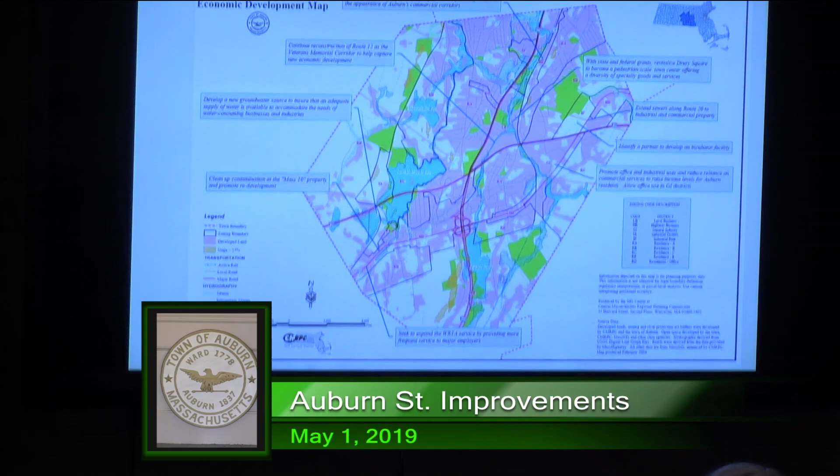I put this up because this is from the 2006 master plan's economic development map. What caught my eye was it identifying Drury Square as an area that should be enhanced for pedestrian activity, enhanced for commercial activity, have zoning changes to make it more attractive to investors, businesses, retailers, pedestrians and their customers, and also identifying state and federal grants that may be available to implement the infrastructure—which brings us here tonight on the roadway improvement projects. I'd consider it a partnership with the state, and others more qualified than me will explain the state roadway portion, but that's exactly what the master plan was trying to accomplish 13 years ago.

One other thing—there's another article on the warrant, a Drury Square village bylaw. I want to make sure I get this right—it's Article 32. It's a large warrant.

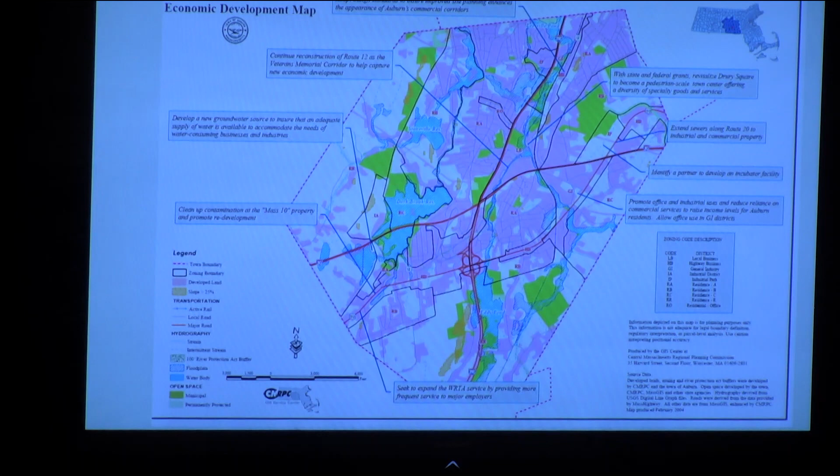They are completely separate. Tom had asked me about that tonight, so in case anyone else was curious, these are two separate articles, independent of one another. If one goes and the other doesn't, it doesn't jeopardize the other project. I'll tell you, if both are approved, they complement each other extremely well. Adam Menard, our town planner, is here to answer any questions on the bylaw itself. After this is over we'll focus on this piece, but we don't want to leave your questions on that article unanswered.

On that article, because we've been asked by some people how this happened—how did we get to this—it's been in the works for about a year and a half, with 8 public hearings. There were 2 meetings where we specifically invited town meeting members to explain this to them. There was one meeting open to the public but focused on inviting the businesses in Drury Square. Then there were 3 additional community meetings where we invited everybody to come and comment. We took all the comments from all those public meetings and incorporated them into the bylaw, then brought it to the planning board, which had 2 hearings and unanimously approved it, I believe, last month. So the bylaw in the warrant has been vetted through the community, through 8 public hearings and a year and a half of research, work, and public input.

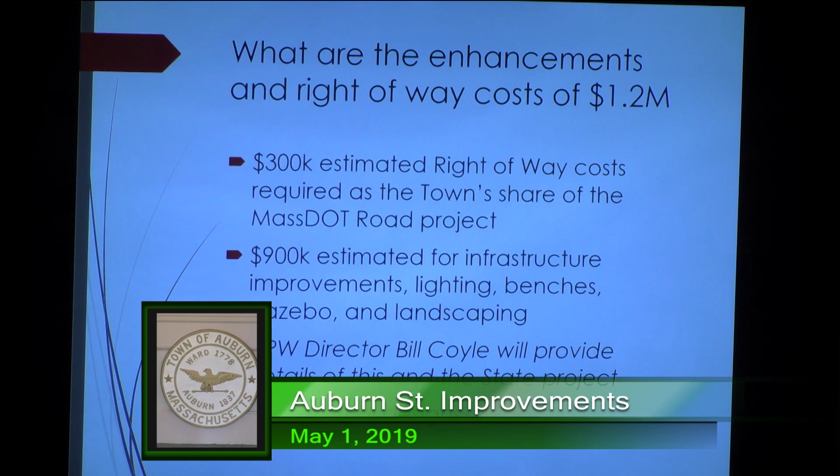So, to get to this project—what are the enhancements and right-of-way costs totaling $1.2 million? Bill Coyle, our DPW director, will introduce the team and give you the details; I just want to be broad here. About $300,000 of the $1.2 million is the estimated right-of-way cost required for the state to move forward with their portion of the project. The remaining $900,000 is to add enhanced infrastructure improvements that the state would not pay for.

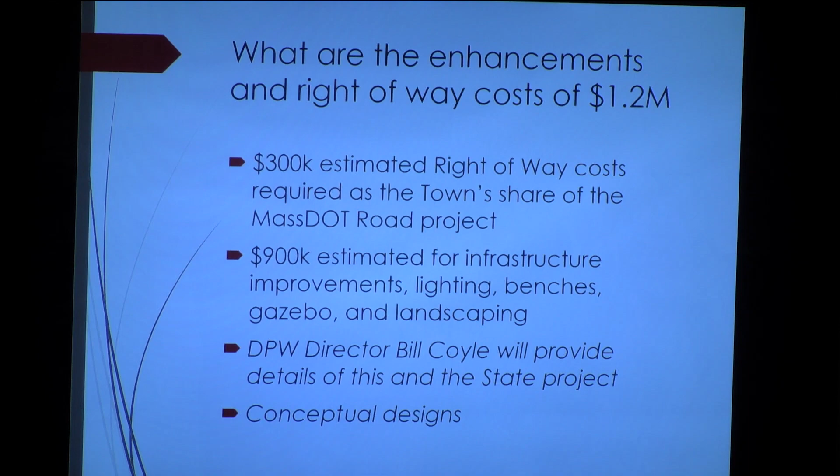These include enhanced lighting, the ability to add flowers, plantings, banners, benches, a gazebo, landscaping, trees, and greenery—just making it look more attractive. The roadway improvements will make it safer. We're trying to enhance its look, usability, and friendliness, so we encourage residents and visitors not just to drive through Auburn but to stop, stay, use our parks, visit our retailers, have lunch in the park, see the pond. There are things people just drive right by, and we're trying to slow all that down so they take a look, while still keeping it functional.

You've seen the conceptual designs, so a question was asked. Dan, we spoke the other day, so thank you for asking. He said, Julie, have you guys looked at what the impact of the borrowing is? I didn't want to answer without going through all the analysis, so I told you I'd get back to you, and I thought this would be important for everybody.

Our assessor, Cindy Cosgrove, and our assistant town manager and CFO, Ed Kazanovich, worked a lot on this. Ed was saying that we would probably do a $1.2 million, 10-year borrowing on this for a bond. We don't need all 1.2 in 1 year, but we do need the approval of it all at once. The right-of-way work would be the first part done, probably in the first 6 months to 1 year. The remaining $900,000, depending on how the project went, would probably be toward the end of the first year and into the second year and beyond.

How we would fund it: we would do a BAN, which is a short-term borrowing. The interest is insignificant on a BAN. We do that with our school projects, all of our borrowing projects. Then when the project's done, we would bond it with a 10-year bond.

Based on an average residential single-family value, and this is from the assessor's office, all data-driven, of $263,291, the impact on the average single-family residential property would be $18.43 that year. That gets built into your tax rate, so it goes into your bill the first year. It doesn't compound, in other words it stays there, so the next year it's still in there, but you're not adding another 18.43. So over 10 years, you're talking $180 total.

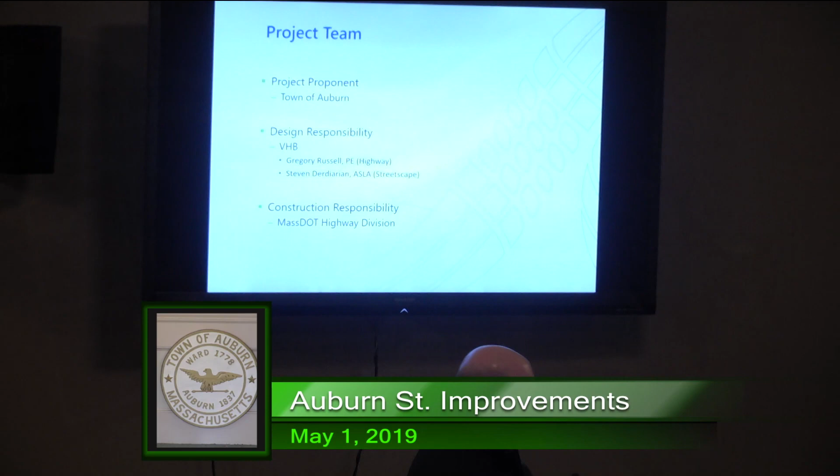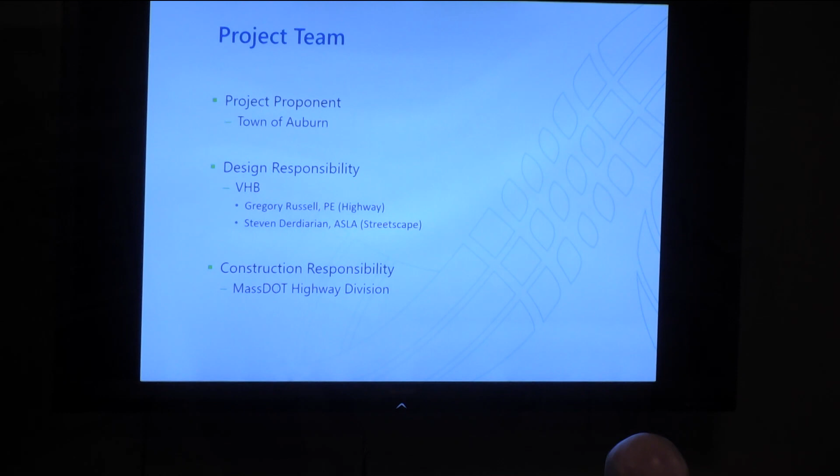From a DOT perspective, the town is the proponent for the project. The town hired VHB to develop the design plans and bring it through the Mass DOT process. Once that's complete, DOT takes over with regards to construction and construction admin.

I was using the down arrow. Just use that one. There we go, thank you. Let's do this.

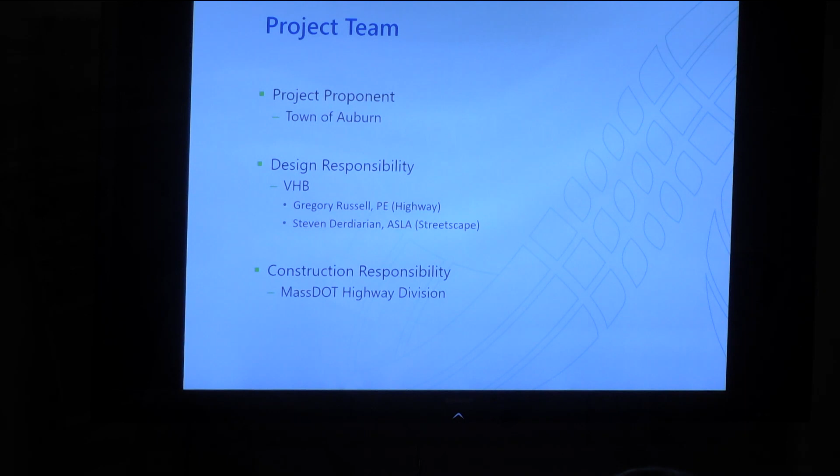Let's close out some of these.

While they're fixing that, and it's a good chance, I did want to add a couple things. I was going to add them at the end, but I'll add them now, so give them an opportunity.

I mentioned it to Tom, I believe, but wanted to let everyone know we're also working with Central One Credit Union, and we are developing a new facade program for Drury Square, totally separate from this, but again, it's another enhancement to Drury Square. Through Central One Credit Union, businesses will be able to get low-interest loans and potential grant incentives for fixing up the front of their buildings and making them nice and putting up nice signage. Another thing, we just got a wayfinding grant.

Again, this ties into this. The wayfinding grant is going to help us with signage and designing signage. We also received a design grant to help us with the facade program, to actually do renderings and designs of what the buildings could look like for those owners who may be interested in doing upgrades. Completely voluntary, you don't have to, but there's some great programs that we're doing with this.

And lastly, Senator Moore and Representative Frost over the last couple of years have asked me what our priorities are, what they could put in from this potential funding from the state. As of yesterday, Senator Moore, I believe, had put in $50,000 for Drury Square in the state budget. We don't know if we'll get it or not, but if we do, that is another $50,000. So I just wanted to add that. Thanks.

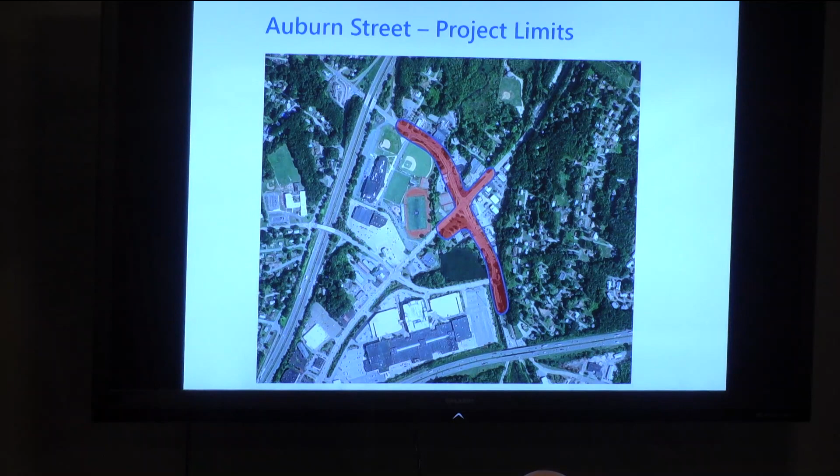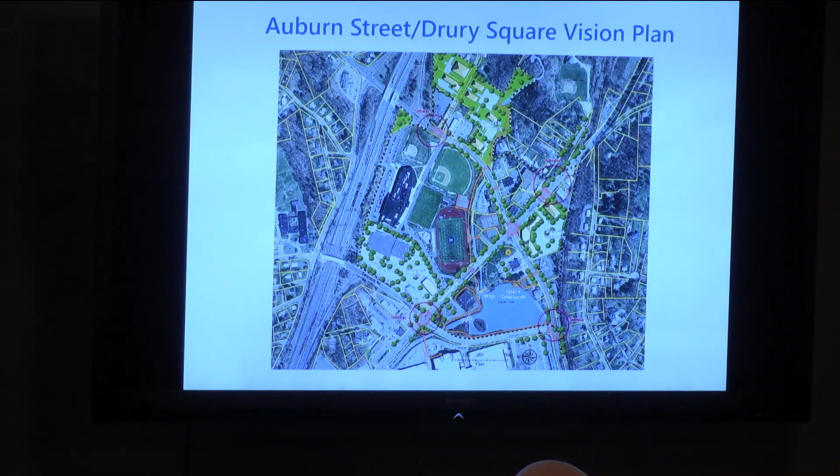This is just reflecting the Drury Square vision plan that Julie had mentioned earlier, and this was kind of the driving force of some of the parks and streetscape that has been incorporated into this project, which Steve will talk about in a little bit.

Going back to what Bill started, some project history. The town initiated this project in 2013. They brought VHB on board, and since then we've been working progressively to move the project forward through the DOT process.

In 2017, we conducted a road safety audit at the intersection of Route 12 and Auburn Street. At that location, at that time, there had been 39 crashes in 3 years. It was considered a high crash location, and because of that road safety audit, the state has assigned money from a specific pot of money onto the TIP, which has allowed the TIP value to grow some. That's approximately almost $600,000.

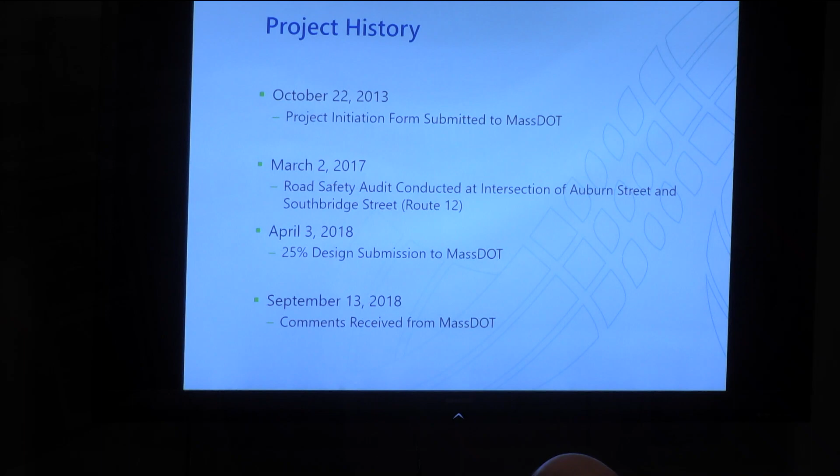The 25% design was then submitted last April, in 2018. We received comments back after doing some field work, utility walks with utility companies, received comments back from DOT in September, and we've been working through that point to now, addressing those comments and trying to schedule a design public hearing, which will be one of the next steps.

Project needs, among other things, pavement. Up here we just have a couple examples: one's the crosswalk up by the high school, and the area heading towards Brotherton Way. There's some long-term pavement deterioration that's been happening along the corridor. This is most noticeable south of Route 12, heading towards the mall. The area along the corridor has been patched numerous times due to utilities, and some of those patches are starting to sink, as you can see through the crosswalk.

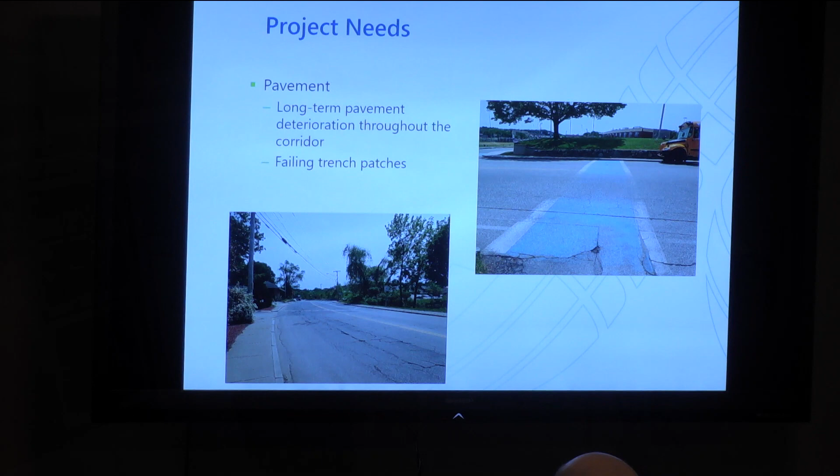Safety, as I mentioned, we've done a road safety audit at the request of the state at the intersection. Among other things, there's obviously poor sidewalk continuity throughout the corridor. Route 12 is a barrier with poor pedestrian accommodations. There's really no bicycle accommodations currently, and we're going to look to fix or improve that at least. There's also missing, non-compliant, or no wheelchair ramps at all in certain locations.

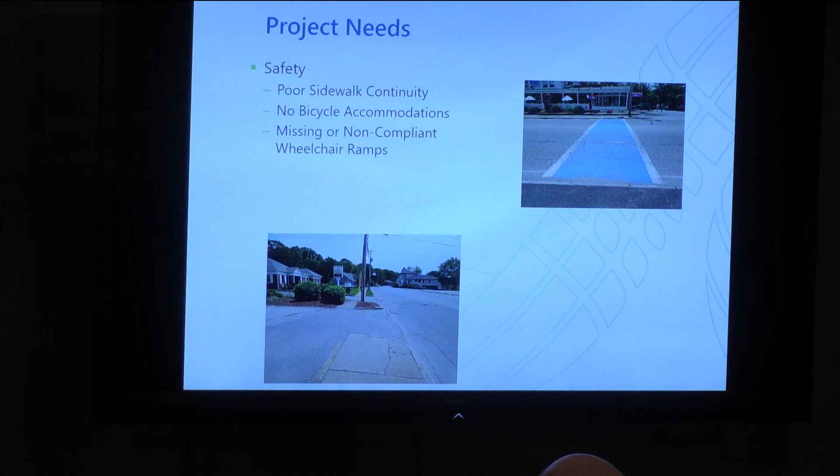Some of our goals is to fix some of that. Streetscape, one of the things when you go down the corridor, there's really no distinction. There's large, wide-open curb cuts. There's really no distinction between the sidewalk, the parking lots, the driveways, the road, in some cases, in front of the fire station. There's a huge curb cut. There's no real definition of where the sidewalk is and where the road ends, where the driveway and parking starts. And across the street in front of the Verizon store, there's really, again, no definition between the drive aisle, the parking, and the sidewalk.

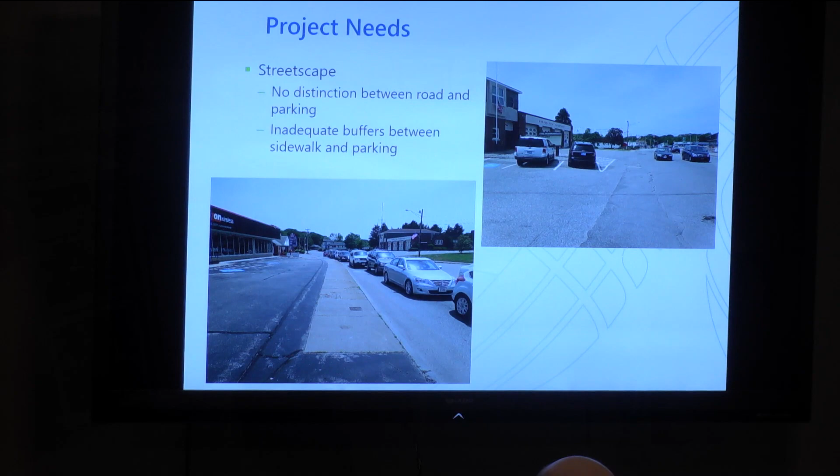So, project goals: we want to improve the roadway and the intersection safety for a variety of things. Specifically, at the intersection of Route 12, we're proposing all new pedestrian signal equipment. This will provide exclusive pedestrian phases across that intersection. We're looking to carry the sidewalk across the island, the channelized right turn island, to connect that to the sidewalk on the fire station corner, to provide a continuous flow of pedestrian traffic.

We're also proposing rapid flashing beacons at the crosswalk by McDonald's and the high school.

Roadway, the pavement, drainage - we're going to try and reuse as much of the existing drainage infrastructure as possible. We will be adjusting it as needed, installing new catch basins where needed. Those will have deep sumps and hoods to improve water quality. For the majority of the project, mill and overlay will occur between Route 12 and the high school. Once we get past Route 12, right now it's being proposed to be reconstructed - a full-depth reconstruction or reclamation, one way or the other. But that's a more intense process due to the failing pavement in that area.

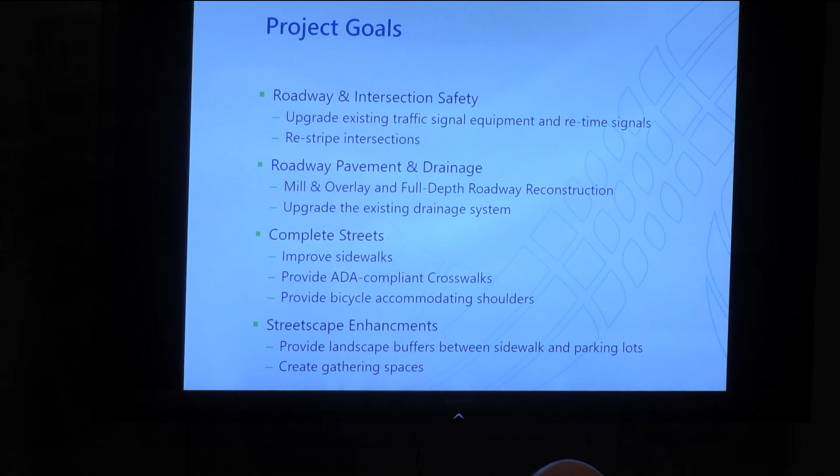So I'm going to go through the corridor, or the roadway design. These are the same slides that are in the back of the room that will be set up. And then I'll go through this, and I'll turn it over to Steve to go over the landscape.

We looked at numerous ways to reduce the pavement width, but due to the high number of curb cuts along the corridor, there really wasn't a good place to either implement occasional left turn lanes, or narrow it down to one lane, just because we felt that the abundance of driveways would result in traffic issues up and down the corridor. So this is kind of the solution that we have come up with at the time.

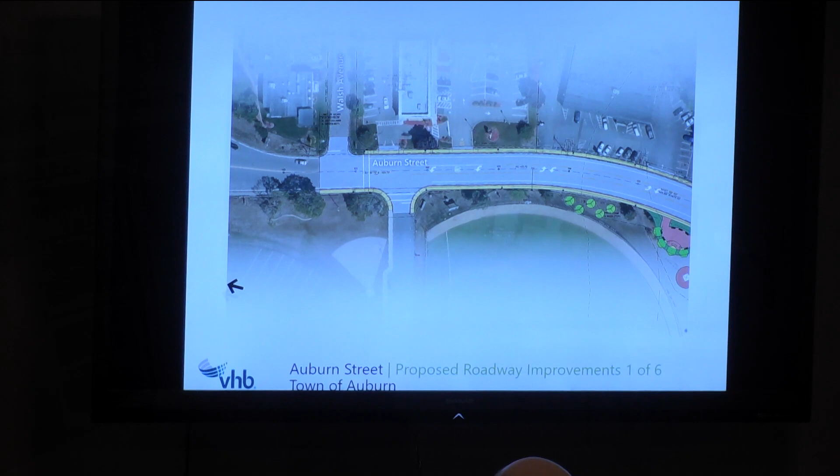Moving down past the high school, we have the first of the pocket parks just before the brook crossing. And then we're also on the bridge.

The initial intent was to leave the bridge alone, basically cut at either end. The state came back and requested that we take a look at replacing the guardrail leading up to the bridge. And that, in turn, leads to needing to basically replace the existing bridge rail over the bridge. So we are looking at that now. That could be done in a few different ways. That may require replacing the sidewalks over the bridge. So we are still looking into that and dealing with MassDOT on how best to approach that issue.

And as we go through, you can see we're adding landscaping where we can. This is in front of the post office property. We've tried to better define the parking area there.

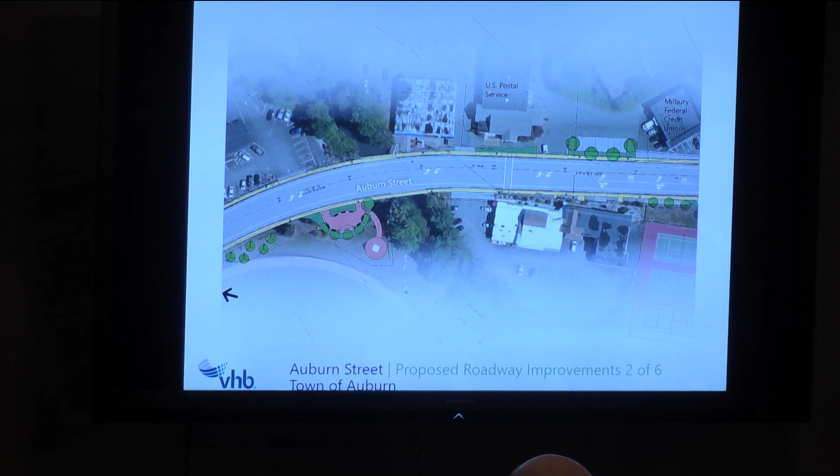And that brings us to the Southbridge Street Route 12 intersection, where again we have another park on the northwest corner by the basketball court and tennis courts, and then a larger area on the southwest corner by the fire department. This includes refurbishing the island.

Right now it's difficult to see when you're trying to make a right turn due to some of the vegetation that's there, some of the boxes. This was brought up during the road safety audit, so we'll be reformatting that island to make it easier to see when you're making a right, as well as to carry the sidewalk all the way across and provide a continuous path for pedestrians.

We're also adding some landscaping on the east side, in front of the Verizon store in that plaza, to kind of break up the parking.

For the signal, right now we're proposing, as part of the road safety audit, one of the recommendations that came out of that audit was to convert the northbound Auburn Street approach to a left turn only and a through-right.

Where currently today it's two general purpose through lanes with a permissive left turn. The permissive left turn will still stay for the northbound.

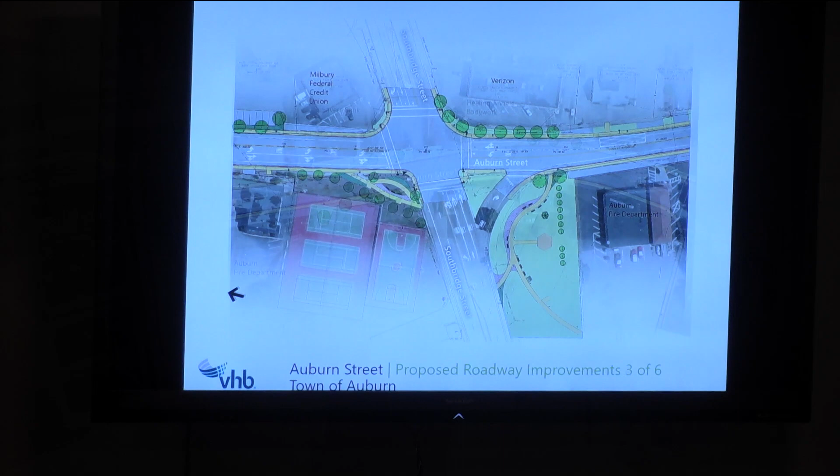Moving down past the fire station, again some more landscaping, trying to define some of the parking areas, especially just south of the fire station. And again, carrying the sidewalks—these are standard 5-foot sidewalks, granite curb, all the way down, with 5-foot shoulders and 11-foot travel lanes for the majority of the corridor.

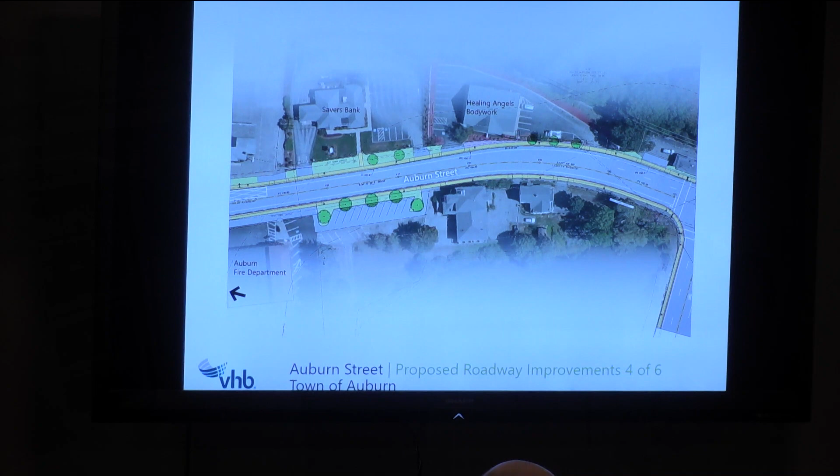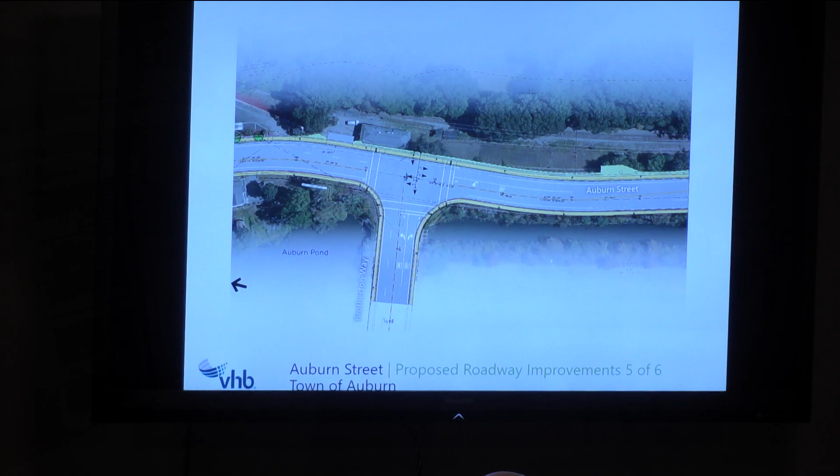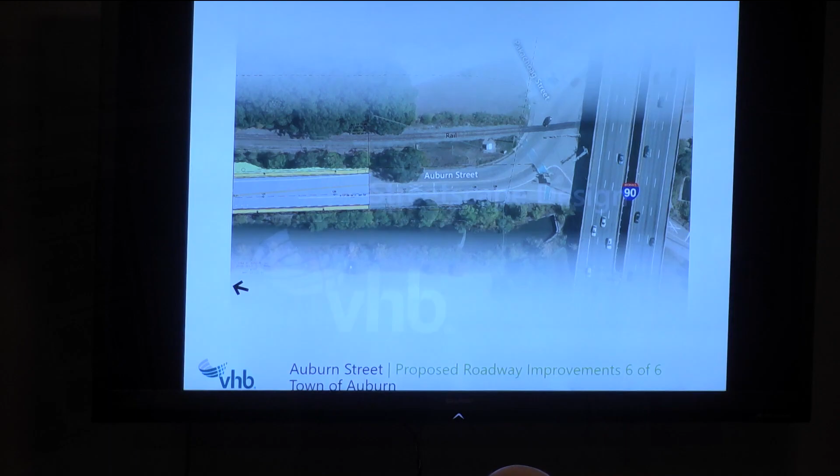And then we get to Brotherton Way, where we have a new traffic signal. We'll be, for the most part, maintaining the existing lane use and providing a new traffic signal with pedestrian crossings with exclusive pedestrian phases. And that carries us to the end of the project, where we tie in just before Central Street and end there. Now I'm going to turn it over to Steve to discuss the streetscape.

How do you advance to this? Oh, just... Okay, very good. Hi.

Hi, I'm Steve Dudarian, the landscape architect for the project. I think Greg's brought you through the overall corridor and given you a sense of the roadway design, but in this area what we've tried to introduce is a much more pedestrian-friendly corridor, essentially.

The sidewalks will have feature trim strips along the edges that are stamped concrete rather than brick, so they're very low maintenance, but they give it a pedestrian scale.

Where opportunities present themselves, we're also introducing pocket parks—small areas. The one indicated in this slide, that semicircle, is an area where there's already some memorials, as well as the historic cupola alongside it. What we're introducing there will be a bike rack, as well as benches, some flowering beds that are very low maintenance using perennials and ornamental grasses—simply a kind of gateway treatment as you're entering the corridor.

At this point, on the opposite side of the road by the post office, we'd be working with the post office, suggesting the idea of bringing in a green panel along the front of their parking lot. This is one of the locations where, as you drive down the corridor, it's very difficult to tell where the roadway ends and the parking lot begins, because it's all pavement through there. Now we'll be introducing a new sidewalk, street trees along that edge as well, and in front of the post office, also dressing that up in collaboration with them.

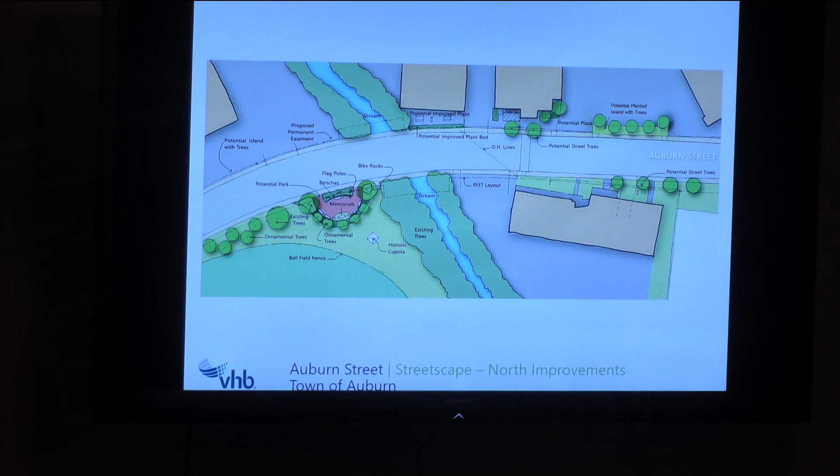And let's see if I can do this. Okay. The Southbridge and...

Auburn Street intersection—we're introducing a park on the left side. In this location here, it's easier for me to just point, where currently there's simply a path there, with a metal guardrail along the roadway. You'd never even know there's a green space in that location.

Working with the town, we've come up with a suggestion of introducing bollards in lieu of the guardrail. They'd also serve as a protection device, but you can see through it to the space beyond, raising that area up more towards street level, so that you can see a seating area for folks in front of the basketball court, and introducing some trees as well, creating an informal edge along that pathway.

It's part of an overall design for that intersection, where on the other side of the road we're introducing, on a very steep slope that exists within the right-of-way, some plantings. At the Verizon building on the upper right, in some of the gained green space that's part of this project, we're introducing some street trees and ornamental grasses flanking the sidewalk, so that you have a very nicely defined edge, but can still see the Verizon parking.

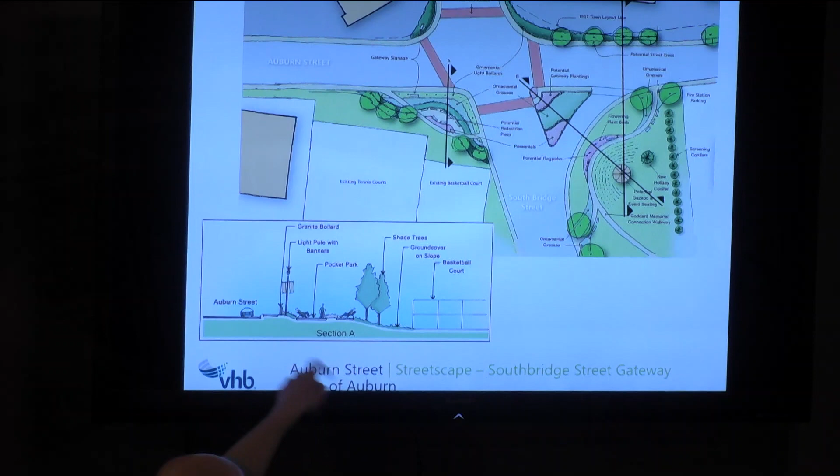We've also provided some section views through here, giving you a sense. This section here is the section shown by that dark line, first dark line, A.

This cuts through the pocket park to the basketball court on the right, giving you a sense of the slope down to the basketball court, the terrace we're creating at a higher level so you can see pedestrian activity, the idea of benches, some flower beds, ornamental lighting possibly with banner arms, and granite bollards edging this, so you now have a transparent edge and can see there's another of Auburn's parks in this location.

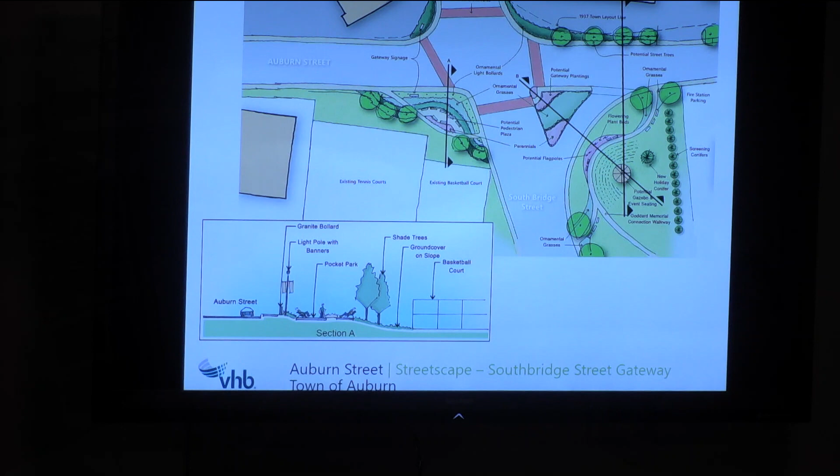It's really just a blank side of the building there, so this would introduce some interest and a backdrop, and possibly mound it up to get more mileage out of it.

In the center would be the park space itself, along the walkway where you introduce flagpoles, ornamental lighting, seating, that sort of thing. Between that area and the gazebo, possibly have some seating as well, so you could have summer concerts out there and other activities.

And the triangular island begins to give a sense of the idea of lower growing greenery, very low maintenance, and ornamental grasses, so that triangular island now has a cohesive design with some real interest as you're driving by.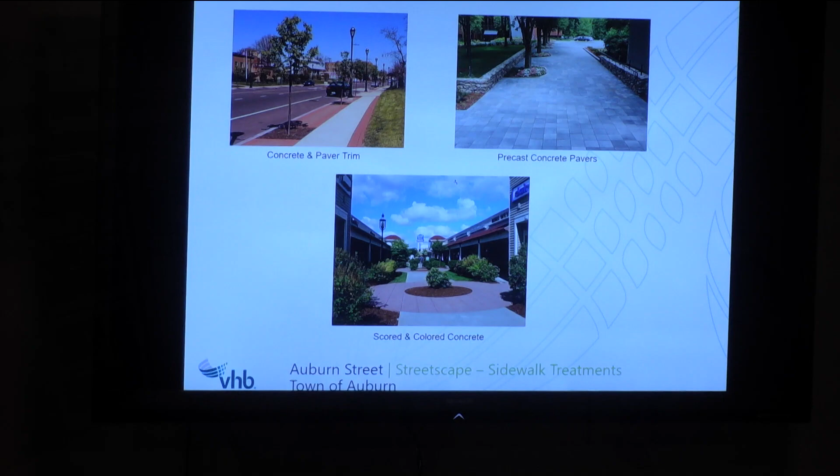And the idea of again introducing a gazebo into the park area so it becomes a true public space. It's basically what's called placemaking, and it really makes for an iconic image in Auburn Center.

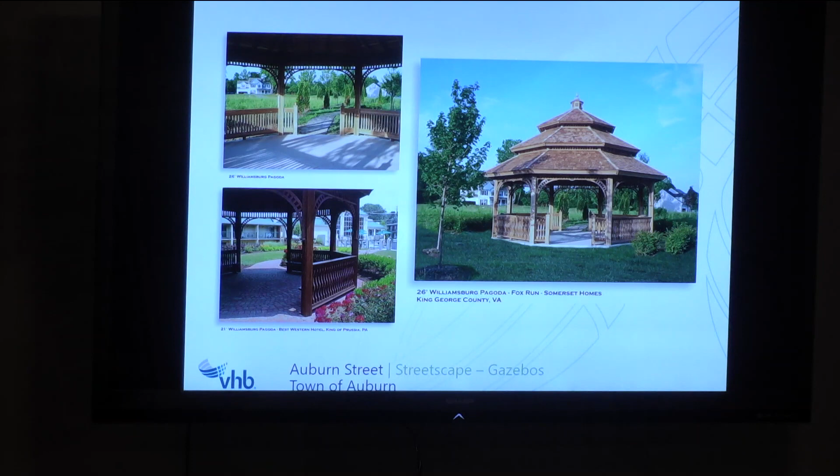Okay, the idea of bollards, which could be introduced along the edge of the tennis court area, which is currently all metal guardrail, so you really can't see what's beyond that. This would still preserve the safety features, but allow you to see in.

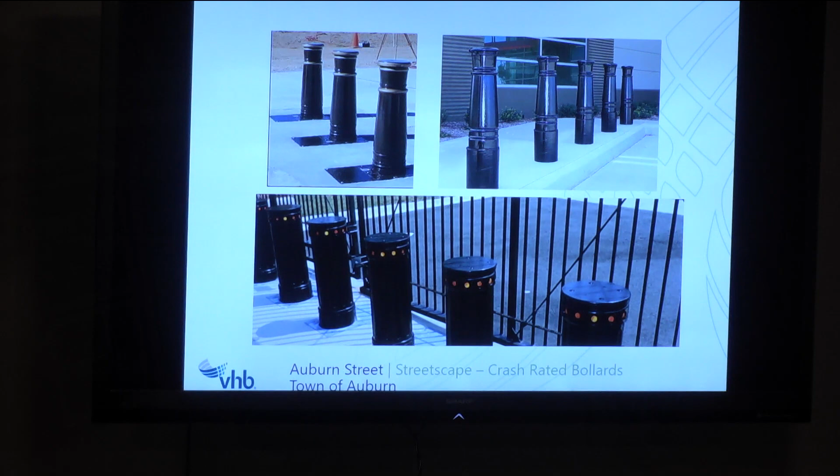We're still in discussions as far as exact design of the light poles, but this gives you an idea of the range of opportunities as far as their design, and also the idea that you can introduce banners, especially in the center area, and also possibly some areas where you might have hanging planters.

They're more of a maintenance item, but in feature areas that could be possible as well. The lights themselves would all be LED lights, which everybody's going to now. They're very energy efficient, and they really direct the light exactly where you want it to go.

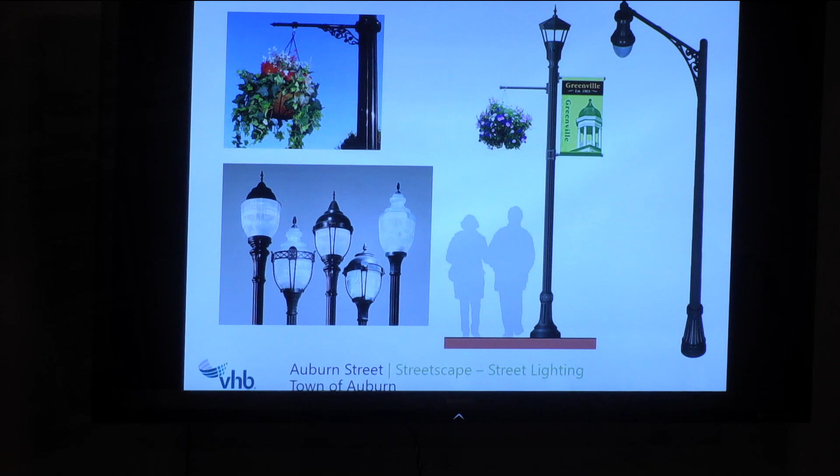Just quickly, a gamut of ideas as far as ornamental trees that could go in the park spaces, and street trees, screening trees towards the fire station at the top, and ideas as far as very durable plant material on the lower part, ornamental grasses, perennials, and then in the park space we might introduce some shrubs for seasonal color.

Would you mind going back one slide, please? Sure. That do it? There we go. Yes.

Some of those trees are going to be rather large once they get going, correct? That's correct. Will they fit into what we're trying to do? They'll be used in different locations.

The flowering pears remain fairly small and compact. Wherever you have overhead wires, that kind of thing, they're often selected. On the edges where that's not an issue, you could have larger shade trees introduced in the green strips that we're acquiring along the frontage of a lot of the properties.

So essentially, instead of having just a boulevard with all one tree type down it, which we'd like to avoid, that introduces what's called a monoculture, where if some kind of disease strikes, you lose all of your trees. We'd actually have it broken into sections of different types of trees down through the corridor. It's also a lot more interesting. I don't know if that helps.

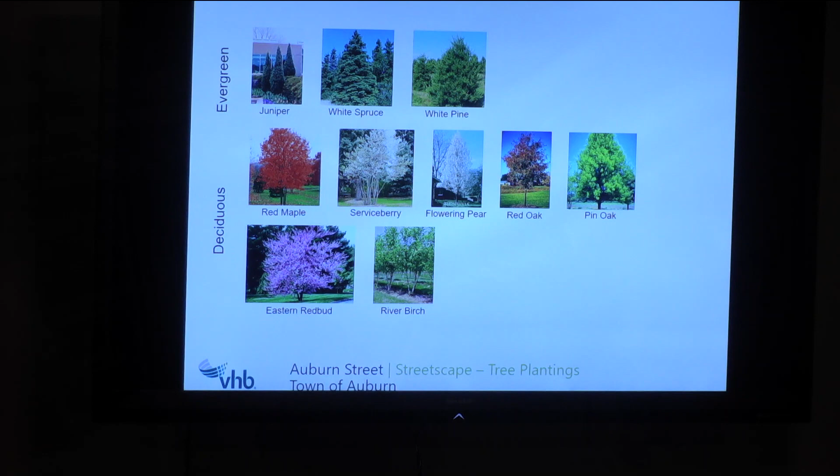And there's improved varieties now. There was a deal with pears a while back where they had an issue of breakage because they had a weak crotch area in the crown. The Chanticleer pears, red spire pears, there's a lot that are much more upright now that don't have those issues. And they have fall color, which lasts among the longest of the trees as far as fall color, and early spring flowering. You see a lot of them in flower now.

Okay, thank you. Okay. Very good. Thank you, Steve. Greg, you going to add, or are you all set?

Just going to take a quick run through the next steps from the DOT standpoint. So the goal here is to hopefully have a Mass DOT design public hearing for this project at some point in June.

That's the next step. Mass DOT will come out, they'll bring a stenographer, the whole thing will be put on record. You'll be notified, Bill mentioned that. And then get that, and we can advance to the 75% design.

We'll be working, hopefully, through the summer, with that being submitted sometime in the fall. And then once the 75% design has been accepted, the town can begin the right-of-way process. That's kind of the next big milestone for these projects.